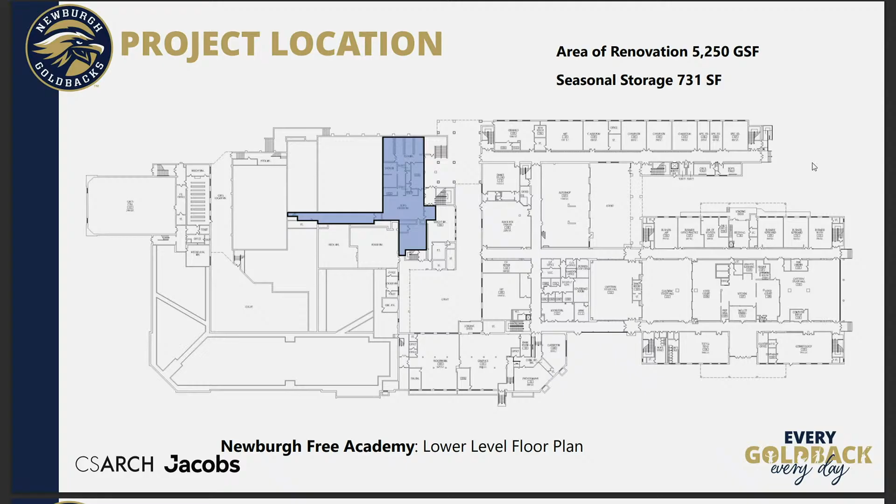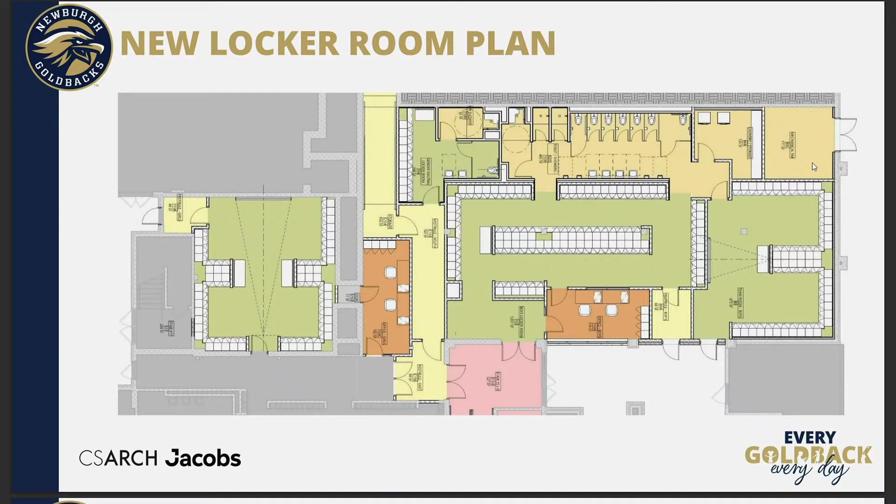Thank you. So let's start with the locker rooms. I think we all understand the locker rooms are on the lower level, just below the gym level. This area designates the area that's being renovated for the new boys locker room, boys team room, and girls team room. Here you can see the layout. To the left you have a girls team room. It's bifurcated by a new corridor which connects through to a storage area and actually the upper gymnasium as well. In the center area you have the boys locker room, and to the right you have a boys team room. The areas in orange are male and female coaches' offices.

So we've gone through the schedule many times. We did begin construction May of this year, and we are still anticipating a November 20th completion date. So we're a few weeks away from being complete. We'll show you some photographs of where we are in process. We will have about a month or a month and a half of closeout. That always lags a little bit after we get substantial completion, do our punch list items, and then get all of the warranty and other paperwork to close the project out.

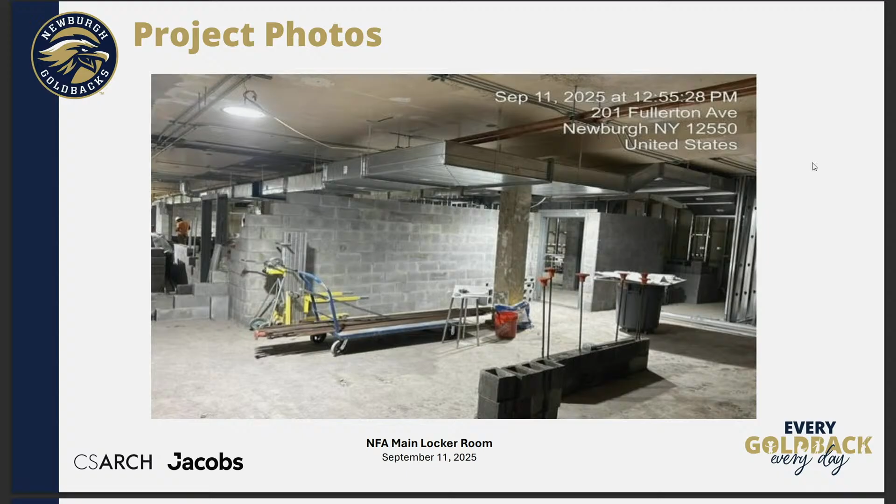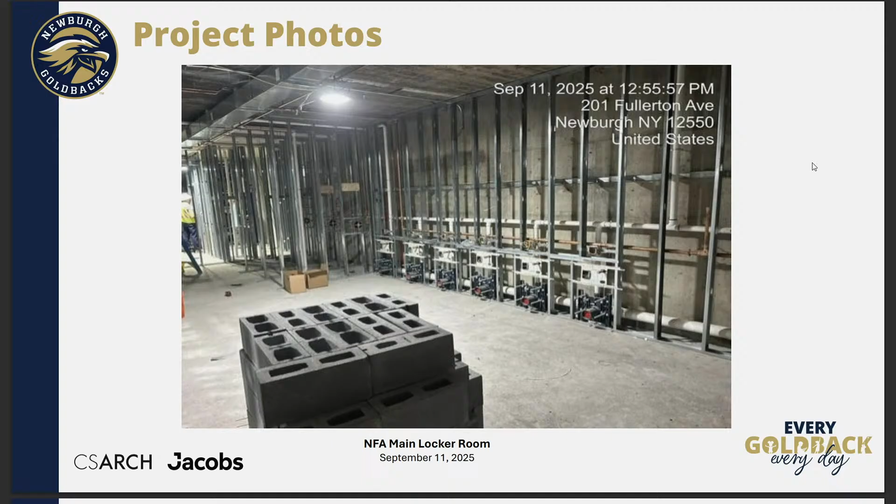So here you can see photos from September 11th, this past week. You can see a lot of the block work is continuing. A lot of the duct work is in place. Floors have all been pretty much, for the most part, leveled. A lot of things are on order, locker rooms are on track, and a lot of the plumbing is in place. Go to some of the other photographs. So here you can see plumbing in place for the toileting in the boys' locker room. Beyond that are shower areas, both for handicapped as well as regular shower units.

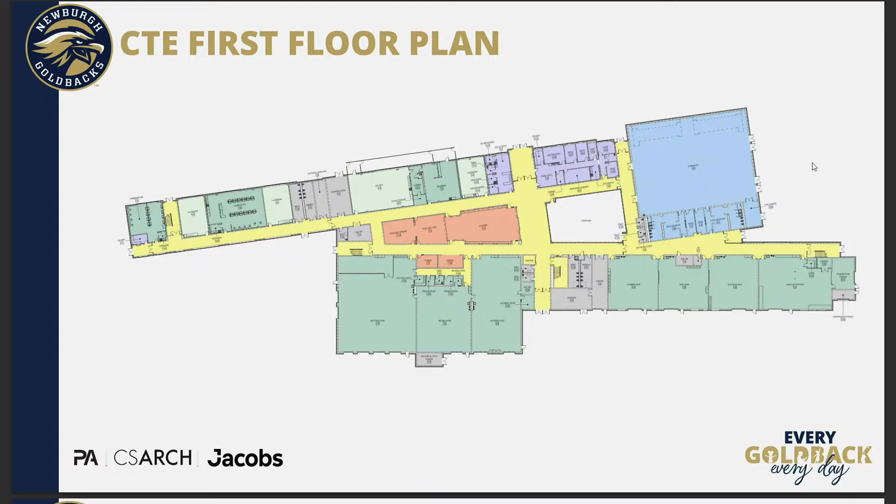Okay, thank you. So moving on to CTE, of course we've all seen these drawings previously. This is the site-related drawing, the floor plans. I won't belabor and go through each of the areas because I want to update you on where we are with the construction.

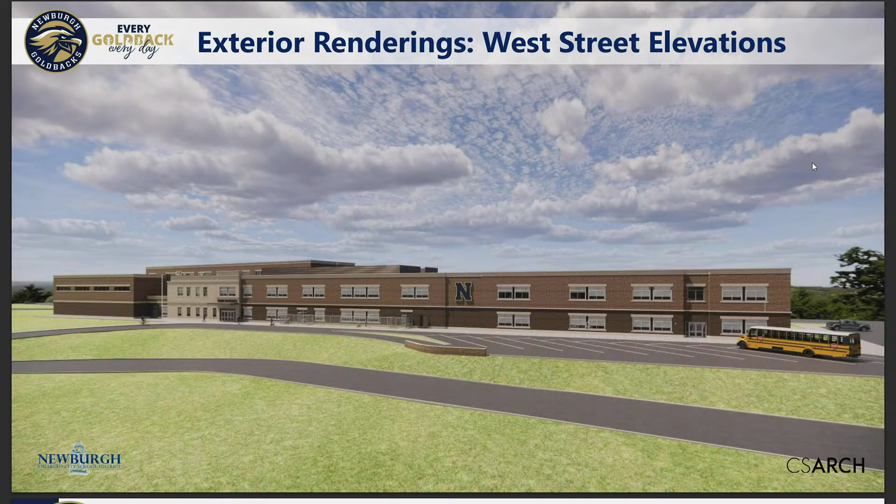Show you where we are to date. These were taken on the 8th. You can see the masonry at the exterior is really coming along nicely and moving around the building.

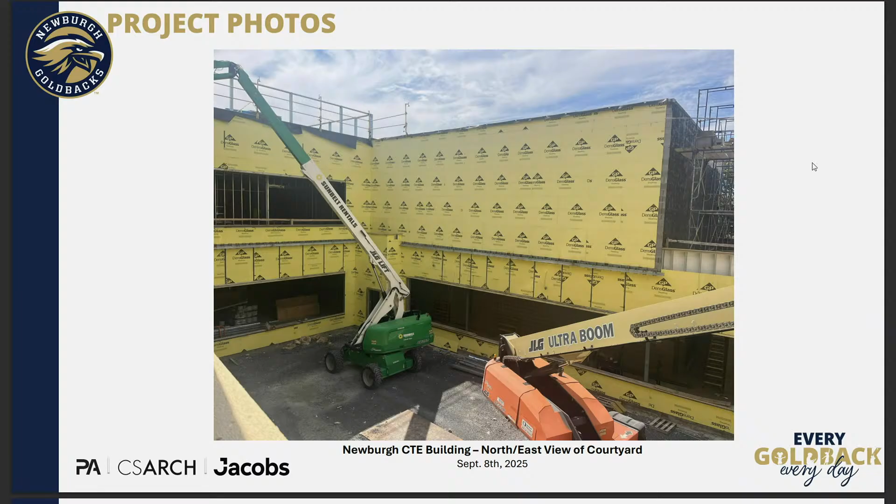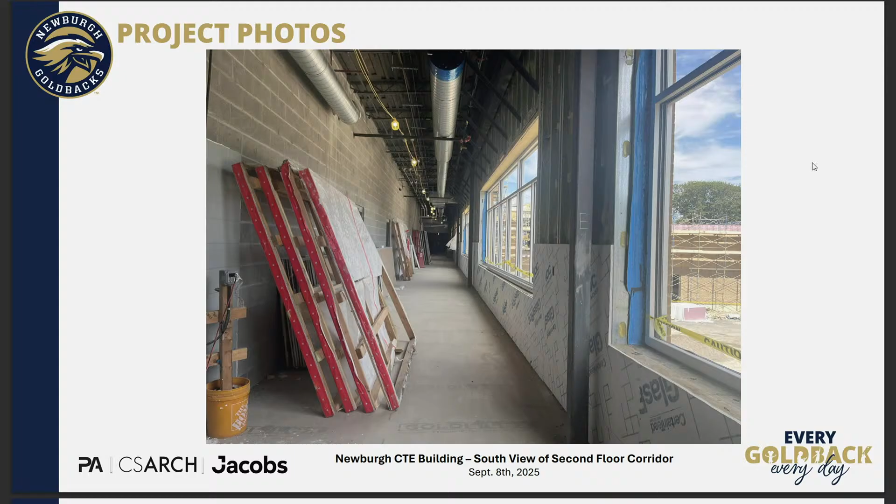This is the interior courtyard, which will serve as a student dining space in really good weather in the summer, giving them some more room for the cafeteria use. Some of the upper corridors - you can see these are single loaded corridors, so we get nice natural light throughout the building. It's really, really nice in this one wing of the building.

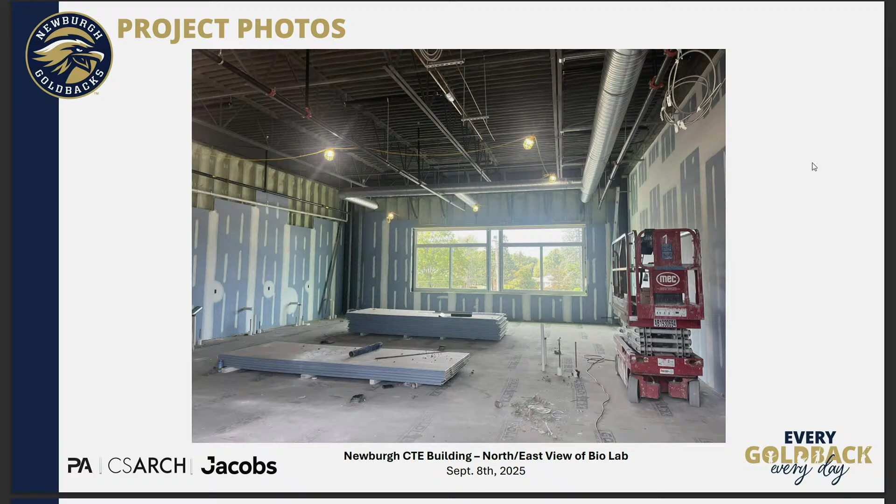Some of the interior spaces, one of the classrooms - you can see boards going up, moving along very, very nicely. This is toward the north, this is the 3-story tower. You can see this is kind of the later phased parts of the construction as they sequence through the building. This is the secondary security entrance at the south end of the building.

So we'll go through the budget. Oh, where did the aerials go? I thought the aerials were supposed to be in there, so I apologize - I had lovely aerials. We drone flight the building every month to track the construction, and those are all also available for your website as well. We're going to be doing a website update for the district for the projects so that we get that information current for the community. I apologize the aerials were not in this because they really give you a different perspective of the building.

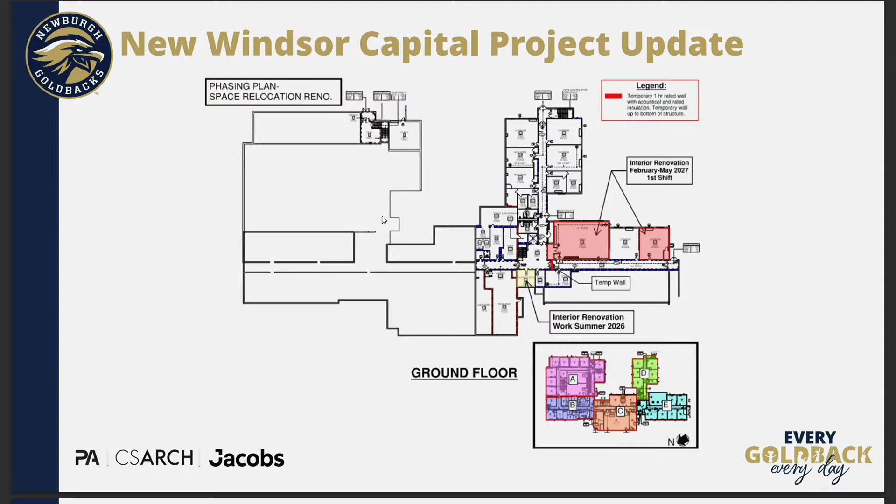Last little stragglers out—these are the last parts of the phasing for the project. And then here's site staging and how we plan to attack from the outside, because there are significant renovations to the parking lot that's all going to be redone. And you see the temp bus loop is in there. That's going to start work next week, actually this Saturday, so we're getting moving on that so we can separate the construction zones from where the kids are.

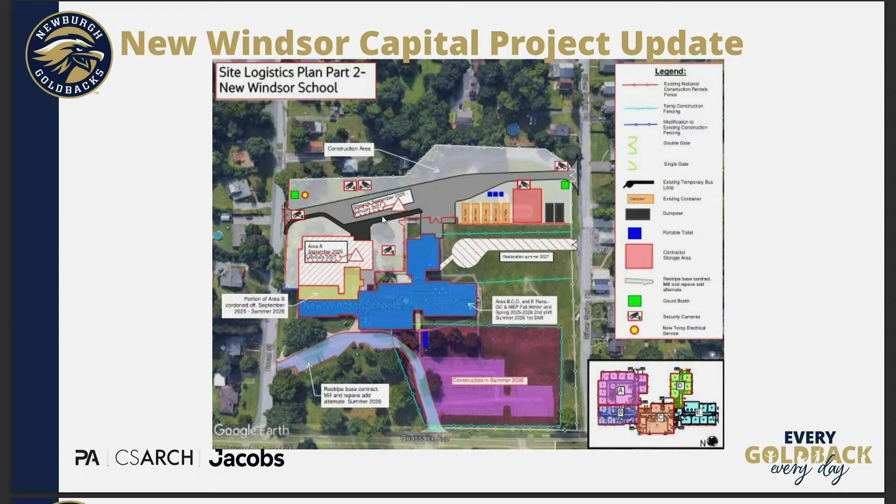And then before we move to Prop 5, I wanted to mention a project not on here—our emergency roof project for NFA. That was completed. At the very end of the project we made a change to eliminate the derelict greenhouse that was in that area of the roof. That was removed, and with its removal we had the roofer come back and roof that section that was covered by the greenhouse, as well as taking those doors out to the greenhouse and blocking them in.

So that is still a change order that's pending for that project. I think the board was told previously that project had been closed out—it actually is not closed out. We have one change order for that last bit of work, and we had some time delay because we were trying to get the roofer back out to add that to the warranty, and we had to get them to inspect that section of roof. So I have one change order process for doing that additional roof work and the work to block up the former openings into the greenhouse.

And then we have a final application. Obviously we never submitted the final application because we knew we had this change order pending. So we have a final application to the roofing contractor as well to process. I just wanted the board to be aware of that, so you're going to see that and say, wait, that was done last summer—so that was the reason. You'll see those moving forward, hopefully within the next one or two board meetings, right?

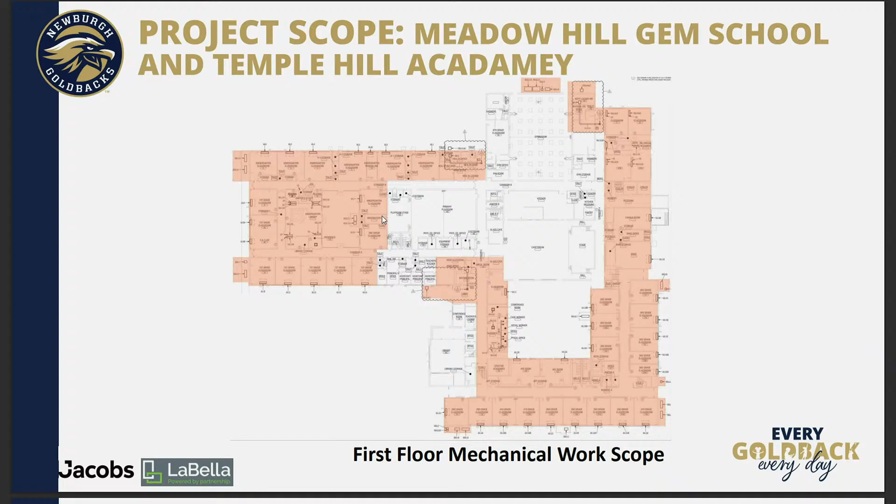This shows the project scope at the schools - we've shown these before, so I'm going to kind of move through them. Here are some pictures of where we are to date. As you can see, we're missing a few little things, such as insulation on a few small pieces of pipe and fencing, but for the most part we are connected, we're done. The RTUs are up, they're on, they're cooling. All the condensers at large have been connected and are working.

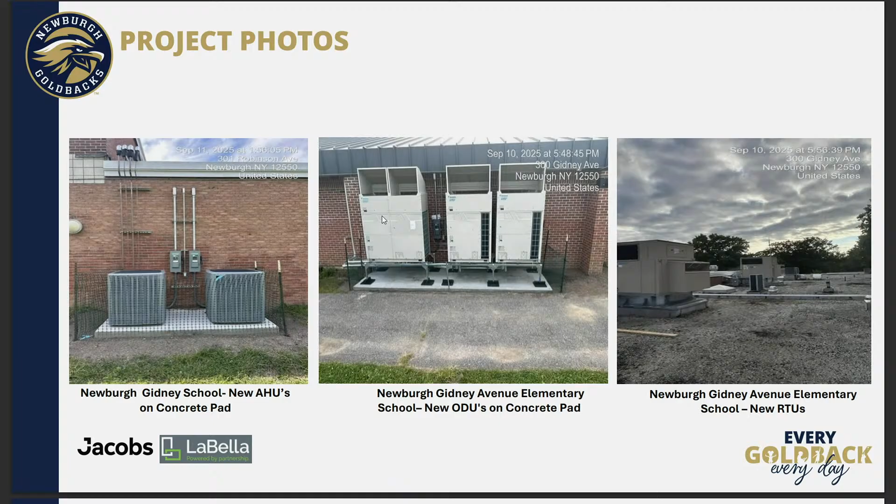These gyms, these are the air handlers in the gym. They're massive, they're in, the ductwork looks great. You can see some of the progress, the hard work performed by everybody this summer. District included, everybody pitched in.

Sure. So the Temple Hill switchgear, electrical switchgear is fine? All that's been taken care of? So I believe we discussed that in executive session last time. We're happy to give you an update, but that couldn't be a public comment.

As far as Temple Hill, was the cafeteria space, the kitchen space included in the air conditioning? Yes. So that's up now? Yes. Okay, alright, thank you.

So this is phase 2, electrical upgrades. We installed new switchgear at 3 schools: Balmville, Gardnertown, Fostertown. This has been substantially complete. We're punching out right now.

I'll give you the schedule, or do you want me to move ahead? Okay, we'll go ahead to the pictures.

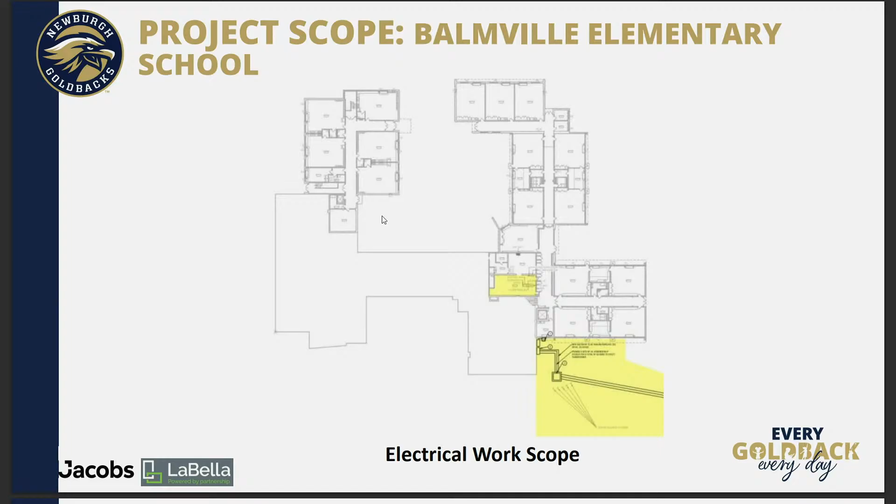Here's the switchgear in place. It's been up, it's working. Balmville was outside, it was the one all the way on the right. Gardnertown, there was a lot of logistical planning getting that in, but we were able to swing that in, so we did a good job there. Fostertown was probably the breeze, it got done first and was able to go. So we're all kind of done here, it's just the last bit of fine tuning, punch listing, and closing out.

And that brings us to the 2019 proposition bond budget. Do you want me to take this, Tom, or do we? Sure, okay.

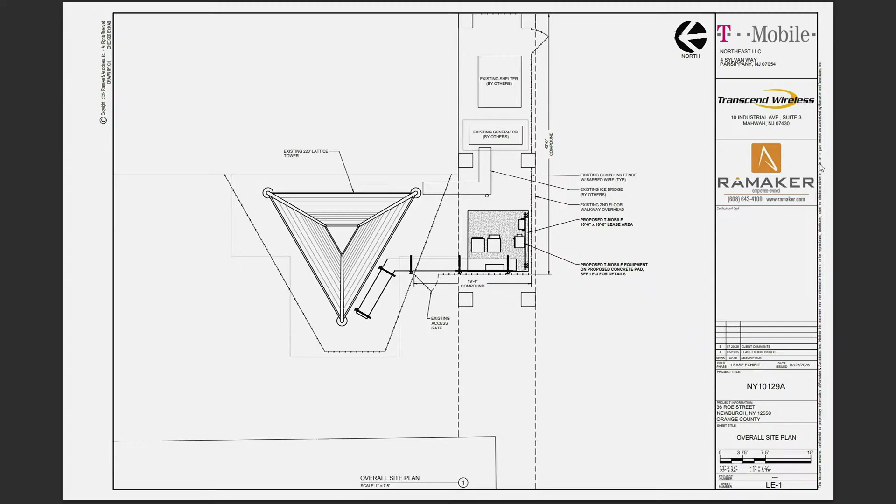So does that mean AT&T will be removing their equipment? They won't be there any longer? That part I don't have the answer to yet. I think the AT&T equipment is probably going to stay there, and T-Mobile is going to add to the tower. AT&T is paying us the lease, but they want to try to buy the lease and then negotiate with the district for their payment. That part of the contract I don't have. They're working with our lawyers.

And do we have enough room for T-Mobile to come in and put their equipment in, or is there space constraint? The tower has plenty of room. Where the equipment is going to be right now, we might have to work with them because that's the driveway that goes to the auto mechanic shop. I spoke with T-Mobile recently, and they're going to come back and change this drawing because currently that's two parking spaces we would lose for the auto mechanic shop.

I guess my question is, are we going to have an auto mechanic shop in a year? Well, we're moving the auto mechanic shop to the CTE site, so when we move it, there'll be plenty of space there. Yes. So is your opinion that we're okay moving forward with this? Once we move to the CTE site, yes.

Now, if we don't relocate this equipment, AT&T already have the generators, and most of the equipment is doubled up. Depending on the negotiation with AT&T, it will come to a final resolution, but right now, until they work their part out, and again I don't have that contract, I cannot give you an answer. I do know that they are willing to move this equipment closer to the other equipment if they can buy that lease out from AT&T.